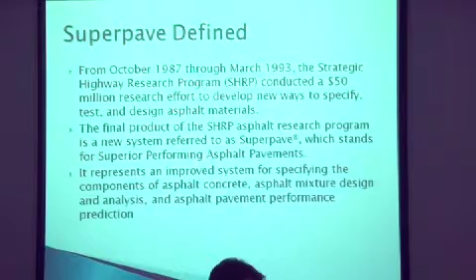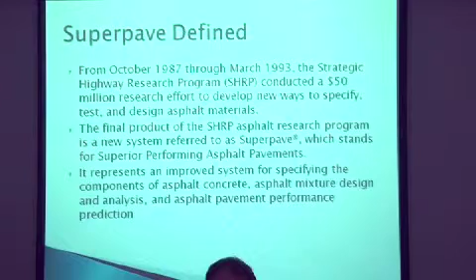So what was SuperPave? To define SuperPave: it was a research project conducted between 1987 and 1993, a strategic highway research program. The total amount spent was $150 million, and of that, $50 million was spent on developing new ways to test and design asphalt materials.

The final product of the asphalt program of the SHRP research effort was a product called SuperPave, an acronym standing for Superior Performing Asphalt Pavement. It really represents an improved system of specifying asphalt materials, both asphalt binders and asphalt mixtures. It included some pavement performance prediction tools, but those tools at that stage were largely not implemented, and pavement performance prediction is really being implemented under another project currently being conducted in the US.

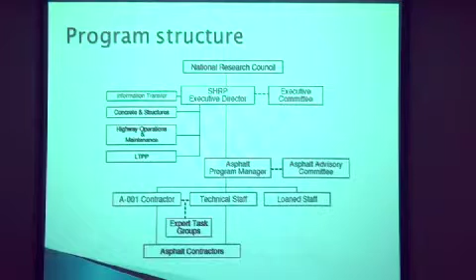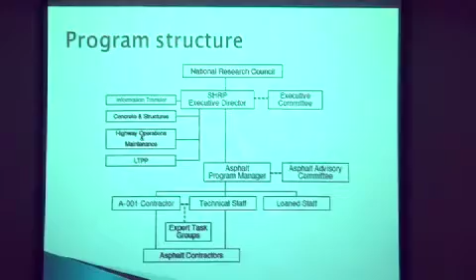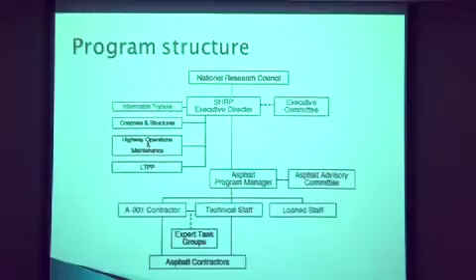This shows the organization of the SuperPave project, or the SHRP project, funded by the National Research Council. There was a SHRP executive director, then a program manager, and underneath the program manager you had 5 contracts. There was contract A001, a management contract, and underneath that a series of contractors: A002 looking at binders and chemistry, A003 looking at mixtures, A004 looking at asphalt modifiers, and A005 looking at asphalt models.

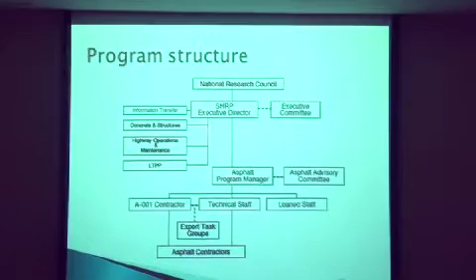One of the things we had was loaned staff - staff from other organizations linked to the SHRP program. For example, we had TRL in England lend SHRP program staff, like Brian Cox from TRL. We had loaned staff from Ireland, from the Netherlands, from Canada, and other countries. So while people think of this as an American program, it's really an international program.

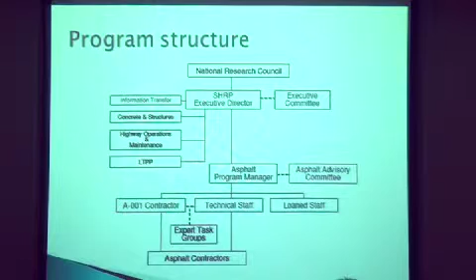We had a conference in London which dealt with the international aspects of SHRP and sharing the benefits. So I would say the SHRP program is best viewed as one that involved a lot of international cooperation to develop the ideas that went into the SuperPave system.

There were various things developed. In terms of developing the binder products, this was the plan: the A002A and A002B contractors developed test results and test methods, which were then validated by tests on modified binder and conventional binders through a validation system. At the end of the day, the A001 contractor was responsible for developing the binder specifications and protocols.

There was a similar flow of information through the mixture contracts. A003 was the lead contractor for mixtures - that was Professor Carl Monismith at the University of Berkeley in California, and he had a series of subcontractors including Oregon State University with Professor Gary Hicks.

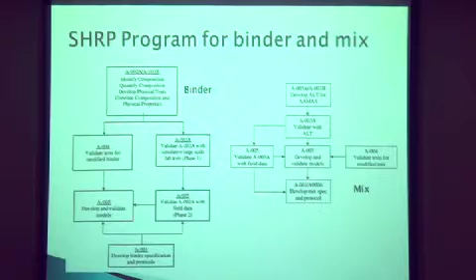We also had people like Ted Vinson and various other folks - Ron Terrell was there, a good friend and colleague of mine. The University of Nottingham was another subcontractor, as was the University of North Carolina. We had a series of people working with Carl and his team, and then there was validation and model development with the A005 team, led by Bob Lytton at Texas A&M University. This was then implemented by the A001 team, led by Tom Kennedy at the University of Texas. People like Tom Kennedy, Jim Moulthrop, and Ron Cominsky were all involved in this implementation effort.

Now, in terms of the SuperPave specifications, we consider 3 different aging conditions for the binder: the original unaged condition, the condition after rolling thin film oven aging, and after pressure aging vessel aging. The idea with these different aging conditions is that they represent the binder at different stages - the original condition represents when it would be mixed with aggregates to make the hot mix material.

In the original condition, we're more concerned about rutting and deformation properties. Rolling thin film oven is still an early life condition, so we still evaluate rutting for the rolling thin film oven aged binder. Pressure aging vessel is more of a long-term condition where we're concerned about performance such as cracking over a longer period of time. So we condition the binder to these 3 conditions and evaluate these different distress types.

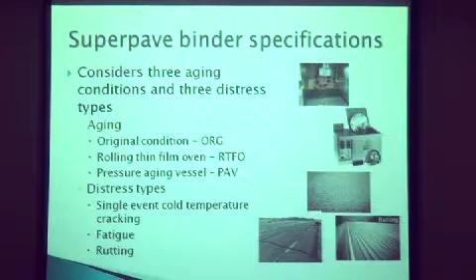So in terms of this specification, what was different with the SuperPave specification versus the earlier tests or specifications? First of all, in SuperPave we have a very strong consideration of climate. The biggest difference is we have the same property adopted, but we test that property at different temperatures.

If you go back to the pen specification, we have maybe 50 pen, 70 pen, 100 pen, but we do the tests all at 25 degrees C. Well, the road isn't at 25 degrees C, the road might be at 50 or 70 degrees C. So in one way it makes sense to test the property you're concerned about at the environmental temperature of the road. This is what we did in SuperPave, and this was a departure from our previous specifications, which were either viscosity specifications or penetration specifications.

In the SuperPave specifications, we say the property of the binder must be this to resist deformation, or it must be this to have good fatigue performance. And then we evaluate that property at the environmental condition that the pavement is in.

But the truck is always the same, whether it's in the north part of Canada or here in Saudi Arabia. It's still the same weight, maybe 40, 50 tons at the most, maybe 20, 30 tons on an average sort of truck. So the truck stays the same.

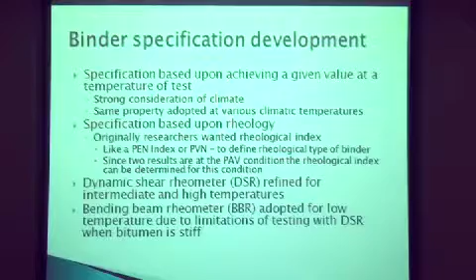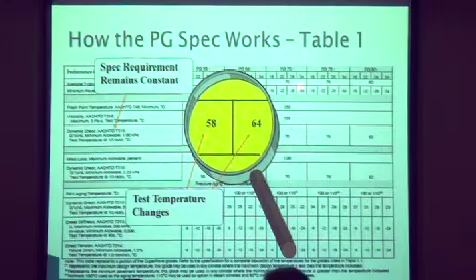The specifications that were produced are in AASHTO M320, where you have a table with these different PG grades, and a series of properties in horizontal rows. For example, here you have a dynamic shear — this number says 1 kilopascal, and the material has to be 1 kilopascal for this particular grade at 58 degrees C. This other grade has to be 1 kilopascal at 64 degrees C, and so on.

You basically are changing the temperature of the test rather than changing the property. This section deals with properties on the unaged binder, then you have properties on the RTFOT binder, and then properties on the PAV-aged binder. So you have different properties to control the parts of the specification that deal with rutting, fatigue, and also low temperature cracking.

And then you have flash point included in the specification — there's a safety aspect. You have viscosity included, which makes sure you can mix the material and pump it in the asphalt plants. So there are these types of requirements as well, and then there's one or two additional requirements in the footnotes, things like solubility, etc., for the bitumen.

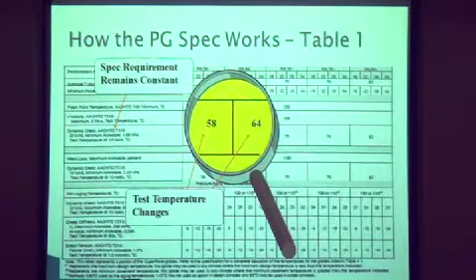In terms of the mixture specifications, I always recommend that folks get this Asphalt Institute publication called SP2. It deals with the superpave mixture design procedure. It's a very nice publication, you can order it online, it's fairly inexpensive, and it deals with the volumetric specifications and the gyratory compaction.

We have consensus properties for aggregates. In the superpave specification development, we had expert task groups sit together and decide on what aggregate properties they felt were appropriate. So we have aggregate properties for flat and elongated particles, for the strength of the particles, and in a way that wasn't too different from what we had in our specifications before.

There was very limited use of the mix design performance tests, like the simple shear device. Some of these tests, when first developed in superpave, were very complicated - you had some very sophisticated pieces of equipment.

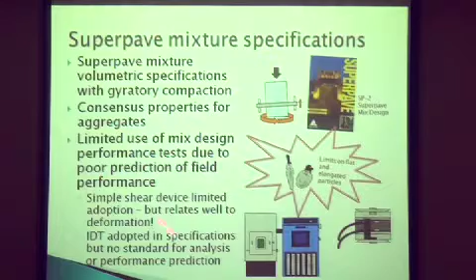Of the things adopted in the specification since superpave, some folks are still using simple shear tests, but it's very limited, and really the research folks are using that. The indirect tensile test has been adopted in some procedures like the mechanistic empirical pavement design. There's some limited adoption of the bending beam fatigue test - probably about 6 or 7 US states use it for evaluating specialized mixes. There's some fairly limited adoption on the mix side, and we'll show you some of that a little bit later on.

So what I want to talk about is some of the developments that have gone on since superpave was initially published, which was around about '94, '95, and what we're doing today. Let's talk about some of the newer ideas with testing.

Since the early 1990s, we've had a series of expert task groups. These expert task groups are very important for the implementation of ideas developed by researchers and academic folks, because you have a research group, some industry folks like the contractors, and government folks like the departments of transport specifying the asphalt mixes. And these are all working together. This implementation is done via federal highways and also involves continuing research and development by task groups.

So this work has resulted in some changes - some alternate binder tests and better understanding of the binder properties, and I'll talk a little bit about these. On the mixes, we've made more use of wheel tracking tests, like the Hamburg test. We're looking at different cracking tests, and I'm going to discuss how we should apply this to different climates.

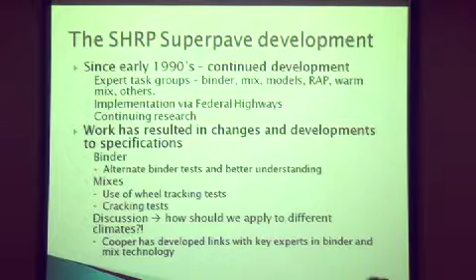What we've done with Cooper is we've developed linkage with all the key industry experts. I sit on expert task groups for both binder and mixture - I'm a member of the binder expert task group, and I lead some of the committee work in the mixture group. Andrew is also involved, Peter is often in the States. So we've linked in with all the key people to make sure we can continually bring you the best possible support on what's going on and the changes in these specifications.

So the newer ideas with testing - what do we see changing?

What I should mention is, Andrew, do you want to come and talk about what's going on with the test equipment here, and particularly the DSR test equipment?

These are the bits of test equipment that we have coming in the SuperPave system for the binders. We have the rolling thin film oven, pressure aging vessel, and the vacuum degassing oven. The idea of the vacuum degassing oven is particularly for things like direct tension tests, which are very sensitive to any air bubbles in the specimen. The vacuum degassing really makes sure you get rid of those air bubbles. We also have the rotational viscometer, the dynamic shear rheometer, bending beam rheometer, and direct tension test.

As Cooper, we support all of this equipment, and what I'd like Andrew to do is take a minute to talk about the support on some of this equipment.

The main thing I wanted to point out on this slide and the next is your classic Malvern dynamic shear rheometer. We've seen them downstairs in the laboratories, we see them all over the world, and there we have it in blue.

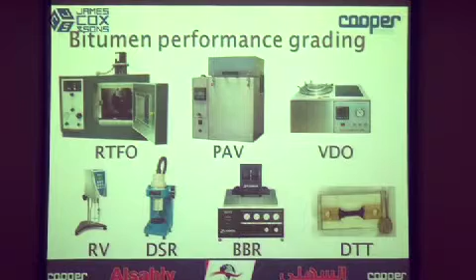Now this is something that Cooper has done recently, a Malvern DSR, but if you see on the front, it's marked Cooper. We've worked directly with Malvern to produce this dynamic shear rheometer, and the purpose of showing this slide is to demonstrate we're not just somebody that is going to resell equipment. The reason we're working with Malvern is that we want to offer great support. We want to put these devices into laboratories, but then support them for the length of their life, not to sell and let them run into disrepair, but to maintain, service, and keep them going for years and years to come.

This is one of the main things we are doing here, working together with Alsahly to ensure that you get great support on these pieces of equipment.

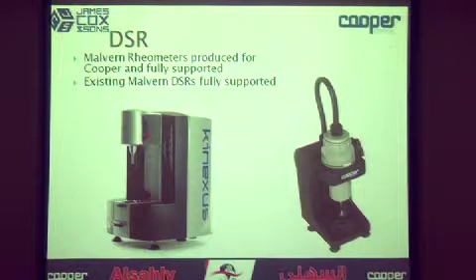The other thing I'll add on the relationship with Malvern is, I've had a business relationship with Malvern now for about 16 years. They've been selling software as part of their technology package. As a team of people working with Malvern, or Bohlin as it was back then - Bohlin was the original company that Malvern acquired and incorporated into its business, so some people think of these rheometers as Bohlin rheometers depending on when they bought the equipment - we've been working with that company now for 15 plus years. We have a very good working relationship with all those folks; we've known them for a very long period of time. That is something we would be very happy to support, maintaining all the existing equipment you have here in the Kingdom of Saudi Arabia.

Going on from that, just to talk about some of the changes that have happened with the specifications - there are three real areas here. One deals with the cold temperature area, one deals with the intermediate temperature and the fatigue cracking or other types of cracking, and one deals with the high temperature rutting type performance.

In the cold temperature cracking area, we have a piece of software that we developed called TSAR, which does a critical cracking temperature analysis. This software really shows the importance of rheology in trying to look at the performance of the asphalt binder, and it makes use of fracture tests.

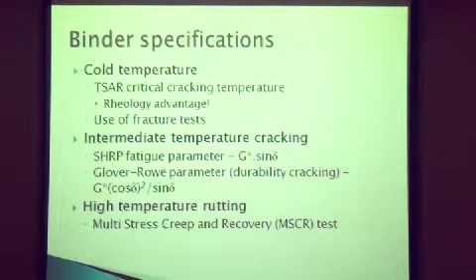For the bending beam rheometer, what we have is a very slender beam. This is a picture of the apparatus, and I know you have this apparatus in your laboratory here. It nicely defines the stiffness in a low temperature region. We collect the stiffness at 8 seconds, 15, 30, 60, 120, and 240 seconds. Normally we only use that 60-second information and throw the rest away, but if you use the full information, you can actually define the rheology of the binder in a very good manner. So it's a very good rheometer that does a nice job defining the rheology in the high stiffness region.

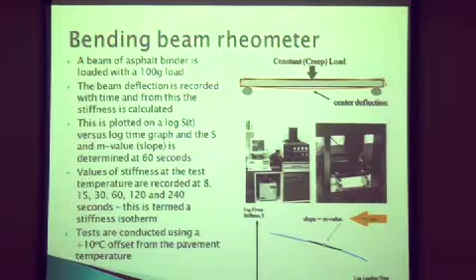In terms of understanding the BBR data, note that the BBR and the DSR are both rheometers, and we can take data from the BBR and convert it to the same format as the DSR data. So we can take the S and the M that we get from the BBR and convert them to a G star and a phase angle, or vice versa. This is called interconversion. The stiffness at 300 megapascals is basically the same as a G star at 111 megapascals, and the 0.3 M value we use is the same as a phase angle of 26.2 degrees.

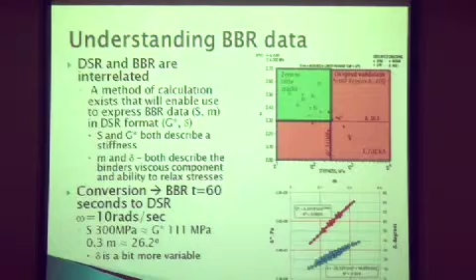This is the original calibration of the low temperature cracking. These were the points that failed, these were the points that were okay. I can plot that as no cracking versus cracking. You see I also have G star on here, and I also put phase angle on that graph as well, so we can relate those two devices very well. If I want to, I can obtain the dynamic properties at the high stiffness region from the bending beam rheometer and combine that data with my analysis of dynamic shear rheometer data. It's a very powerful rheometer for getting information.

For the cold temperature binder specification, we did this type of analysis. This is our TSAR software, developed by my company Abatech, and we take the data from the bending beam rheometer and calculate the thermal stress. This bottom line here is the thermal stress, and as the pavement cools it wants to shrink and contract. As it builds strength, eventually it gets to a point—this second line here is the strength—where all of a sudden it goes bang, and literally the pavement will fail. If you're standing next to that pavement when it fails, you'll hear the sound bang as it fails, and you get this large crack going on.

One of my old friends in asphalt technology, a guy called Ken Candell, told me that one time he was standing next to the road after doing an inspection of the road surface, and he had found no cracks there. He turned around, was writing something down, and all of a sudden heard this large noise, a big bang going on. He turned around and there was a crack in the pavement where that material had just fractured. So this will really give you an acoustic event.

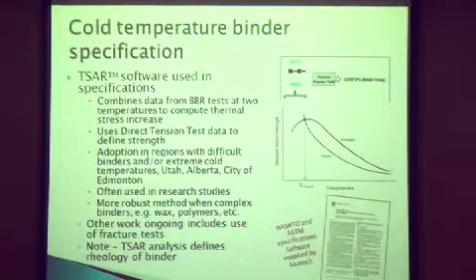There's a standard specification for that. As I say, that low temperature thermal cracking is probably of less interest to you here, but the rheology you get from a bending beam rheometer is probably important for your cracking behavior. I'll explain a bit more about that in a minute.

This is what we call the Glover-Rowe parameter. In the intermediate temperature, we have this existing superpave parameter, G star sine delta, and this gives us information related to fatigue. This really depends upon the rheology of the binder in the range of low to intermediate temperature.

This other parameter, G star cosine squared divided by sine, makes sure that you do not get excessive cracking.

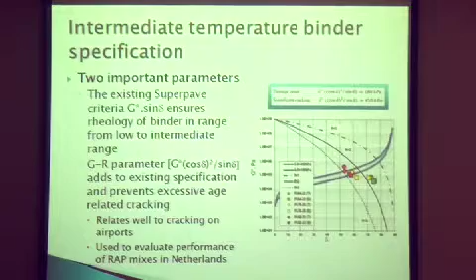This is something that's ongoing in the US at the moment. It's being looked at a lot.

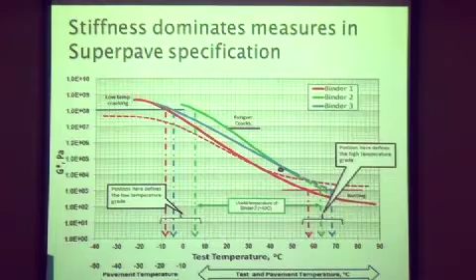So you need to use a good modifier with the correct balance of properties. In terms of high temperature performance, the SHRP specifications were originally developed around G star divided by sine delta. This was the original validation that was done, and I was involved in it. However, what we've noted in the US, as we've used more and more modified binders, is that this has not worked well.

So we've now extended this to include the multi-stress creep and recovery test. This defines a parameter called non-recoverable creep compliance, using the symbol JNR. JNR is really a stress-dependent viscosity. Sometimes in engineering we use complicated words like non-recoverable creep compliance, but really it's just a viscosity.

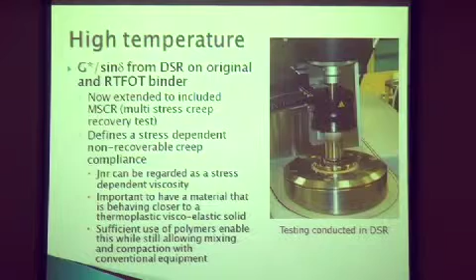What we're doing here is capturing viscosity, trying to get something that behaves closer to a viscoelastic solid material compared to a viscoelastic liquid. All binders you get from an asphalt refinery, whether blown, oxidized, or pitch bitumen, will be a viscoelastic liquid, whether at minus 30 degrees or plus 100 degrees. It's not until you put some chemistry in, with polymer modification and cross-linking, that you start to convert that material to behave closer to a viscoelastic solid. So it's very important to remember that all these binders are viscoelastic liquids.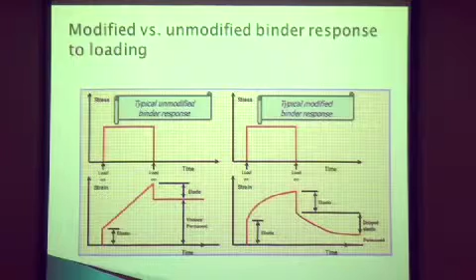So we have this test, MSCR, which is performed in a dynamic shear rheometer. This is showing the test configuration. Here I show you have a sample in a rheometer. Here's a little sample of a binder.

During the test, we start at point A. The rheometer goes to point B, and we put a load on. Then we take the load off, and it comes back to a point. Here's the load going on at point A, up to point B, you take the load off, comes back to point C, and the test continues. Here you have your recovered strain, here you have your unrecovered strain.

The unrecovered strain divided by the stress gives you compliance, whereas in modulus, it's stress divided by strain. We can also calculate the amount of recovery, recovered strain divided by the total strain, as a percentage. Now here you see results for two binders.

This green binder, red binder, structure. What we have here is tests conducted at different levels of stress. Now, standard MSCR test, we use stress levels of 100 and 3,200 pascals. 100 is here. 100 pascals is a very low level of stress.

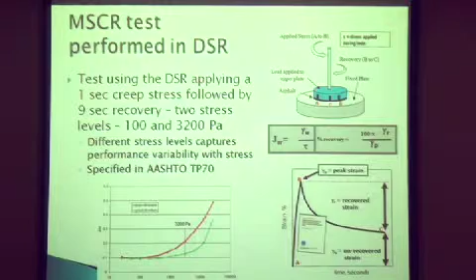Here I show an example with two different types of materials on my next slide. This shows the results of a PG64-22, a conventional unmodified binder, tested at 70 degrees. Here you can see stress of 100 pascals, here 3,200.

You see the little load going on. When I put a load on, there's no recovery. I get strain, no recovery, strain and no recovery, strain and no recovery, and so on. At the higher stress level, you can see the strain step up. Each of those lines is actually three replicate lines on top of each other. Look at the total magnitude: the number here is 200. For that test, I have 200 strain units for that particular binder.

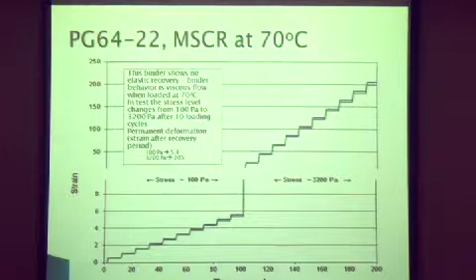This is a standard asphalt paving grade PG64 material. Now I put this one on. Look at the difference in the shape of those curves. Now I put the load on, and that material bounces back. I put the load on, it stretches and bounces back, stretches and bounces back. So these are the load pulses going on.

They look more like load pulses. Here's my permanent strain. What was the number I had before? 200, yeah? What's my number now? 0.05 maybe? Okay, it's like virtually nothing. If I put that on the same scale, it would all be crammed down right at the bottom. So really here I've got something which is behaving very close to a viscoelastic solid.

Same binder, same PG64-22 binder, but I'm using a lot of polymer with it. So this is showing what you can do with modification. It also shows how that test can distinguish very nicely between the polymer modified binders and the conventional binder.

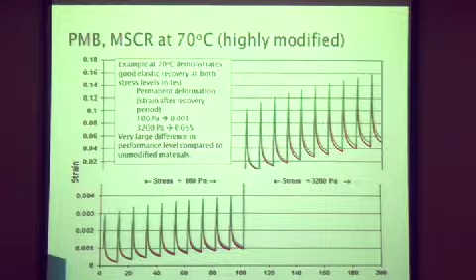So, I congratulate John D'Angelo for doing such a great job in developing the test. It is a real improvement, and I would definitely recommend the Kingdom of Saudi Arabia adopt this test, particularly because of your high temperatures, in evaluating polymer modified binders.

The types of specifications that we have in the US, we use 64 standard, 64 heavy, 64 very heavy, and extreme, those will have the same letters for A&R. And then we'll have PG grade 70 with the same letters, grade 58 with the same.

In the old system, the first superpave specification, we use something called grade bumping. I live in the New Jersey, New York, Philadelphia metropolitan area, where our pavements are in a PG 64 grade area, meaning they get close to 64 degrees C in terms of high temperature performance. On the tollway, the heavy traffic routes and toll booths, they would typically use not 64, not 70, but maybe a 76. They'd do what's called one or two grade bumps, bumping from 64 to 76 to account for slow-moving, heavy traffic.

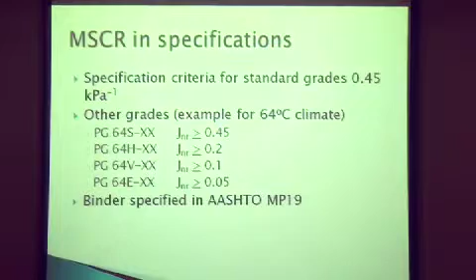Now the importance of rheology and this thing called the R value. There's a report I can give you a link to with some of the history of this. I'll put it on one of the sticks with our sponsors here to make sure you have a copy of the original report. The concept was that you have a rheological index to...

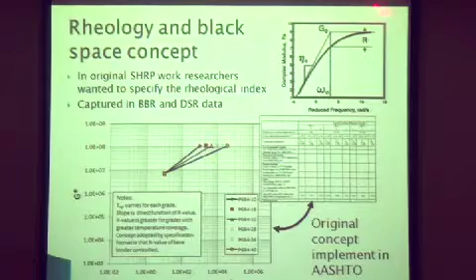This data is plotting G star versus phase angle - the same data. What we know here is that the data, plotted versus phase angle, becomes very important for determining where that cracking will occur.

Remember earlier I showed you the plot of the Glover Rowe parameter? It showed a line in this black space. As the materials age, they start to cross that line. Where you are in the black space is very important for how prone your material is to cracking.

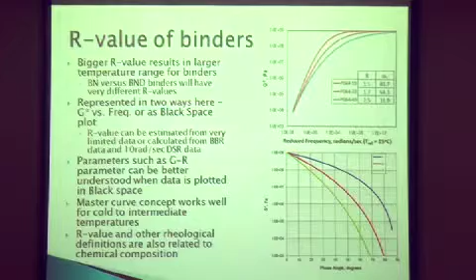The other thing to note is that this rheological index, R value, is also related to chemical composition. Depending on the refinery and oil wells, the type of oil going into that bitumen will affect performance like this. Also, as that material oxidizes and ages, it will change in this way. As you oxidize materials, you make more asphaltene - some of the resins and saturate materials oxidize into more asphaltene parts of the bitumen. This is what we see occurring as we age. With aging, the rheological R value increases and the crossover reduces - you basically change the shape of the binder, of the plastic.

The other thing I'll add here is aging goes in this direction. Referencing the graph and discussion we had yesterday about the possibilities of graphing the behavior, aging goes like this - you want to reduce all your asphalt binder rheology properties, and it goes the opposite way. Aging goes one direction, and any rejuvenation you do goes in the other direction. So we have tools we're developing to help us better understand how these materials change their properties as they age, how they crack - and this is all very new.

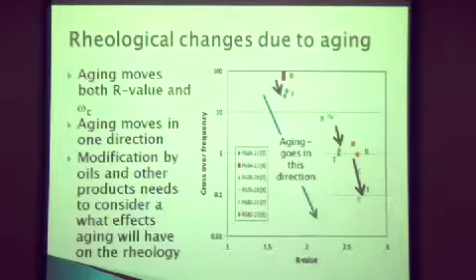This type of work is really being done in the last 3 to 4 years in the US. So it's brand new. The linkage that you have with us all here, we will make sure that you keep fully abreast of these developments as they occur. I mentioned earlier that the chemistry is absolutely tied to the rheology.

This shows some old data going back to 1992. This is a paper a colleague of mine, Dave Anderson, published, and it shows how the R value here, this is what was measured - rheometer - what's calculated is chemistry. Here's a few equations: asphaltene, saturate, aromatics, polar aromatic fractions within a bitumen, and the molecular weight. That was of that sample.

You can see here the equation for the shape of the master curve. Here I have my asphaltenes, saturates, polar, and my naphthenic aromatics. Then I have my molecular weight. Calculate all the other parameters using different equations. We can link the chemistry and the rheology very nicely together.

The other thing I'll mention, this was done in 1992. We have lots more data. I just put this one on because I had a nice simple graph to show you. These were all the SHRP core asphalts. We have a lot more data since that time, and a lot more work has been done on types of analysis.

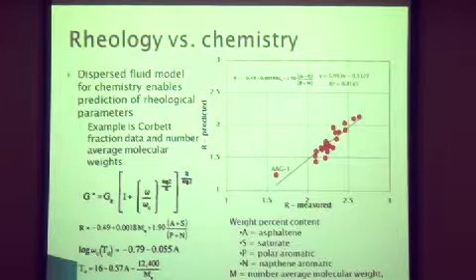We can get a lot of information from things like FTIR. And I saw in your lab here that you have FTIR. There's lots of information you can obtain in terms of analysis of data to get very good information on the rheology.

So when I think of the binder critical design parameters - thermal cracking, BBR test and cracking temperature - what we're recommending is for people who have major cold temperature issues. What I will say is BBR for you is still very important because BBR is helping you define the rheology in that area where the binder is more sensitive to cracking.

Thermal fatigue and durability cracking, the Glover-Rowe parameter G star - this should be a value based on the phase angle score divided by... For rutting, the multi-stress creep recovery test is the best, and then you have the compatibility separation test.

What we want to do is achieve a binder with a good spread of rheological properties - a binder able to relax stress as well, and we want that binder to be strong to resist deformation.

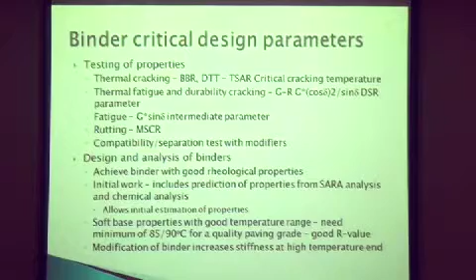Ideally, you want a soft base with a good R-value. Modification of the binder can increase that stiffness at the high temperature end very well.

Since that time, we've been teaching - I teach a course with a gentleman called Jerry Huber and Bill Pine - a course that deals with a more detailed evaluation of the mixtures, like VMA and air voids.

The Bailey method is a way to define the aggregate structure. We do a 1-week training course on this method. The last one I did was up in Calgary, Alberta. It's an area that we could bring here, and we could be involved in teaching this. It's not complicated, it's very detailed - and when I say it's not complicated, I don't mean you have to solve equations like you need a PhD in mathematics. It's very detailed in the sense that there's a lot to understand about how your aggregate structure is behaving. So it would be very good for your conditions.

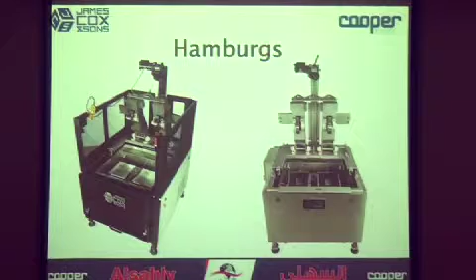I just wanted to say a little bit about Hamburg wheel trackers. The Hamburg wheel tracker is more and more important around the world right now, but even before the Hamburg wheel tracker, Cooper wheel trackers were around probably since 1990. My father was building trackers and designing them for the University of Nottingham.

Before that, maybe in the 80s, maybe the 70s - trackers existed even then. Personally, I know that my first wheel tracker design is still being used at the University of Nottingham every week.

So we've sold more wheel trackers in the world than any other company. Here we see two machines that we've made with James Cox and Son. These devices have been made in California. At the moment in the United States, Hamburg wheel tracking is a very, very popular test method being adopted by many.

On the right here is a machine developed specifically for Caltrans, the Californian Department of Transport. What they wanted, and what they couldn't find anywhere else, was proper stainless steel. There were machines that looked like they were stainless steel, but put a magnet against them and the magnet stuck. It wasn't proper stainless steel.

Now in California, the only machine the Department of Transport will purchase is stainless steel, and we've also worked very hard with them to produce a way of interpreting the slope and the stripping slope. That's that all-important selection. We're the only people with an automated way of analysing the data from the test, telling you whether you have a stripping inflection point, or whether the material never reached that stripping point at all.

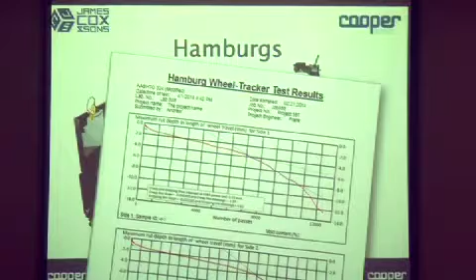This is what we saw downstairs in the labs. This is the AASHTO configuration that you get when you're Hamburg wheel tracking.

Examples of your gyratory specimen with a fine cut across. In the States, they perform asphalt mixture performance tests on specimens from the gyratory compactor. However, I wanted to show this, and this was from yesterday.

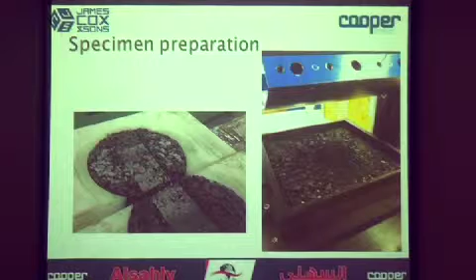Outside of the US, they often prefer production of samples for wheel tracking using this type of square configuration, either 305 millimeters square or 320 by 260 millimeters, and this is compacted using a roller compactor in the vast majority of cases.

So this is sold in huge numbers, down into Australia, Argentina, Canada, Russia, all over the world, because that surface is based upon the diameter of a road roller. What it produces is something that most closely relates to what occurs out on the road, because we're mimicking the effects of a roller, and we compact here directly into the mould.

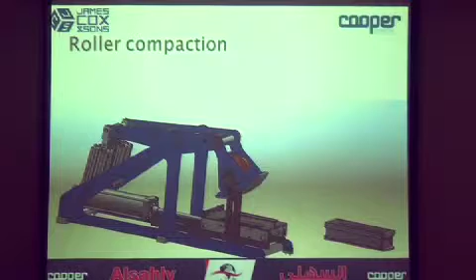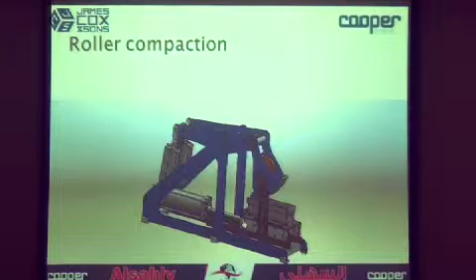So we put our mould in, our roller comes down, compacts until we reach our specified void content, our specified density. Then we take this out again and we can put it directly into our Hamburg wheel tracker, or our dry wheel tracker. A very, very popular method of making specimens for wheel trackers.

I don't think at the moment this is such a popular test within the Kingdom of Saudi Arabia. Certainly elsewhere around the world, whether it be China, Australia, all the way through the Americas and in Europe, 4-point bending is a very, very popular way of assessing fatigue.

In Europe, we have a European standard, and I'm part of the committee tasked with developing and revising it. In the US, there are standards from ASTM and AASHTO. Jeff Rowe here is involved at this present moment in time in revising those standards.

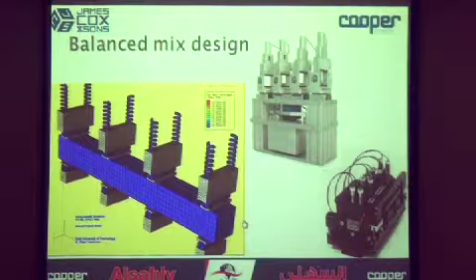Again, we've sold great numbers of these, probably more of these than anyone else in the world. If you look at this device, which is by Cooper, and this device, which is to the AASHTO specification, by James Cox and Sons.

So, here I've shown the popular cracking tests in the US at the moment. There's the semicircular bending test, which has a provisional AASHTO specification and is being used in the balance mix design method.

Then there's the disk-shaped compact tension test, which is used more frequently for low temperature cracking, and was designed by Professor Bill Buttlar at the University of Illinois.

And on the right, a test which has been around since the 1970s and was originally designed to investigate overlay and reflection cracking, with overlays placed on top.

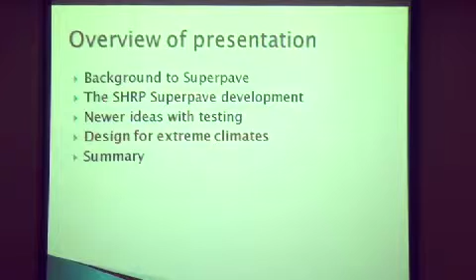I just want to make a couple of comments about designing for extreme climates. Here in Saudi Arabia, you have somewhat higher temperatures than what I'm used to back at home. Back home, I have nice snowy winters, and we actually have a different range of temperatures.

Here you have extreme high temperatures. I know you have some provisional PG binder zones, but the important thing about selecting your PG binder grades is that the climate zones provide the basis for that selection. And built into that, we do an analysis with the traffic loading that would occur in a particular region.

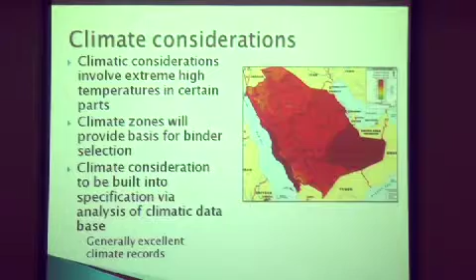Generally, there's fairly excellent climatic records around, and I'm certain in the kingdom here you have excellent climatic records. So to go and do an analysis of pavement effects is fairly easy.

What we do is we have some finite element software that we've developed, to size a pavement structure and look at temperatures for analysis of highways here.

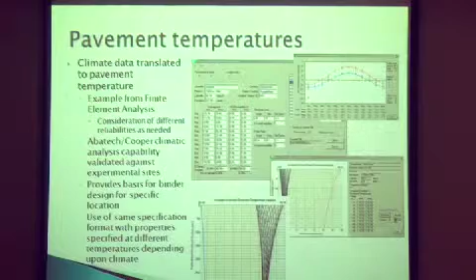But one thing you do know is that the old method originally specified in 1994 was changed in the 2000s. Around about 2004, 2005, they changed the algorithm. So just bear that in mind. We can help you with that if that's something you're interested in looking at.

In terms of the specification grades, we would recommend that you adopt some sort of aging durability parameter, something like the Glover-Rowe parameter, something like the MSCR to define the high temperature, rheology, and to define the cracking, supplement some sort of fracturing test.

In terms of mixtures, the tests that Andrew was talking about - the semicircular bend test, the disk-shaped compact tension test, or the Texas overlay test - are approaches to go with.

In terms of binder, what I'm looking at the moment is like the Vialit pendulum cohesion tester. This is another test device that Cooper manufactures and sells. Something that's been adopted fairly extensively in Europe for looking at the quality of binders. It has a good temperature range, good cohesion strength. We could provide you more notes on that.

I had a paper at a conference on high volume roads. You could use something like the simple shear test. The Hamburg test provides a much easier way of going and analyzing the data you get.

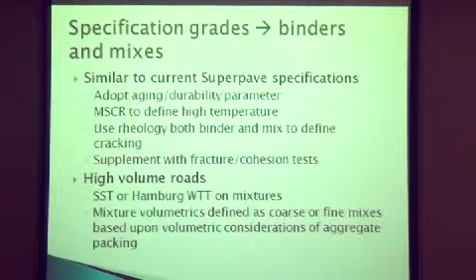So there are different things you can do with that mixture design - it's important to understand, and we're doing a lot more analysis these days. I mentioned the Bailey method, which is an advanced SuperPave method of mix design, and we'd be very happy to work with you on roads in the kingdom to implement some of that technology as well, including aggregate packing and design of the mixes.

We recommend the Hamburg wheel tracking test for quality control, until we can do climate data and make some grade selections. Other factors like traffic and reliability also matter.

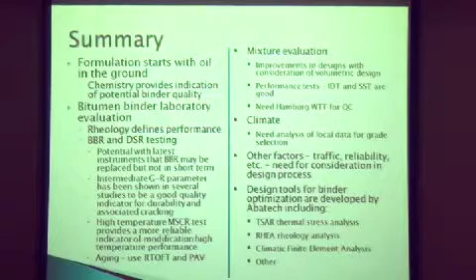What we do, as Abatech and Cooper with our partners, is offer a lot more analysis. We have very sophisticated software tools for analyzing binder, some of the best software in the world. We work with most major rheology analysis software, in use on pretty much every continent, with hundreds of copies out there. So that's a summary of the types of technology we offer.

I wanted to invite Tony to say a couple of concluding comments to wind up the presentation.

Gentlemen, my name is Tony O'Brien, an Irishman, bit of a wanderer. I was over here last September, October, finishing up around Christmas, and these gentlemen approached me and said there was a very good market here for material testing equipment, and if I could source good supply for such equipment, there was a ready-made market here.

During my research, I found a company, Coopers, and I met with Andrew and Peter in London, and we discussed it. Peter outlined that they had some agents working in the Middle East, but they didn't have a very good professional setup here.

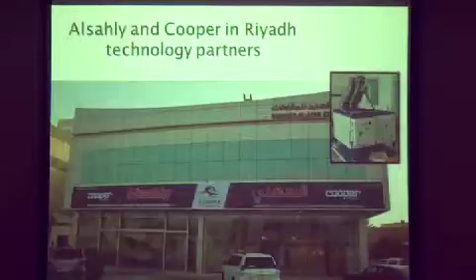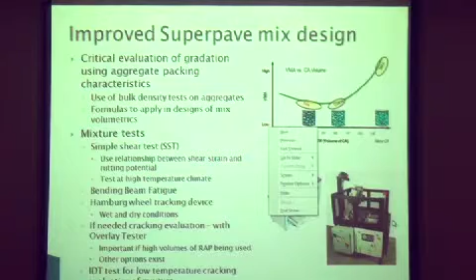I can just put this very quickly and go back on some of these. This graph here, in terms of how we see compaction sensitivity of mixes - we have mixes over on this side of the curve, a lot less sensitive to compaction. Mixes on this side can be more sensitive to compaction. We can understand the sensitivity to compaction by better understanding and better tools for looking at these mixtures.

The other thing we might suggest is to look at a statistically based percent-within-limits type specification. Most of the DOTs in the States these days are going out on a statistical specification, and I think here you're just using ranges, as I would anticipate. So there's a few things we could do, and maybe we could communicate some of this by email.

But there's certainly some things that might help us understand. Without looking at your aggregates and trying to understand, it's a little bit difficult. There's some tests we can do on the aggregate to understand things like crushing potential, how those aggregates are packing together, how they might consolidate under traffic. The other thing is you're using an Ndesign of 100 gyrations - maybe that should be 125, maybe 110, maybe a little bit higher to represent your field conditions more closely. So those sorts of things need to be considered in terms of understanding your situation.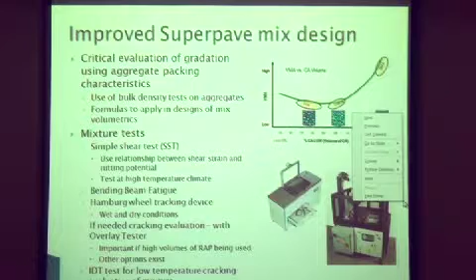We've had a fantastic commitment from Al Sahly in respect to engineers spending time in the UK, learning about equipment, learning how to calibrate the equipment, spending time in our workshop where the equipment is built so they understand the fundamentals. The other thing we spoke about is relationships with companies such as Malvern, and support from Malvern. I was speaking last night to Tony and Mr. Fahad about having backup units in our showroom.

The DSR is a small machine. There's no reason at all why we cannot stock a machine. So if your machine goes down and needs repairing, straight away we send out a replacement machine. In terms of operation, you're up and running immediately. We then repair that machine, and if it takes a long time for parts or any other reason, you don't see that negativity of the machine not working. As soon as your machine breaks, we send out a replacement and you're operable.

We repair your machine. Once we're happy the results coming back from your machine are good and the problem's definitely fixed, then we exchange back. We think by offering this type of service, we can offer over and above anything you've been offered before. And as Tony said, Mr. Fahad's investment in having capital equipment in the showroom will help tremendously.

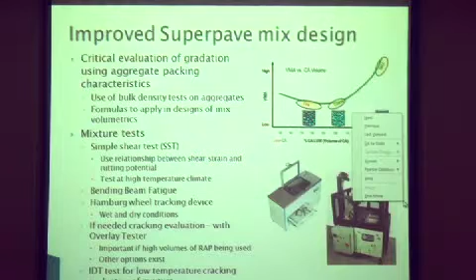Just one last thing on that. What works well for us with lots of customers around the world is that when they buy a machine, they also buy a service contract. You pay a few percent more when you buy your machine, but that ensures there's an engineer on hand. We guarantee a 24-hour response time, and because you've taken out the service contract, you get priority service.

If you pay for the service contract, an engineer comes out twice a year to service your machine, oil, grease, and maintain it, and once a year he'll calibrate the machine. That way you know you've got no unexpected high invoices coming your way for repairs. You've paid it at the beginning of the year, and you get priority service. Customers with those contracts in place have given me nothing but excellent references over the years, and that's enabled the service and support system we offer to expand massively. It's a very important, well-raised point, the service and support of the equipment. Very, very important.

Do we have any more comments or questions or discussion? Yes, sir. I'm sorry, I didn't quite catch that.

Yeah. Every time, right?